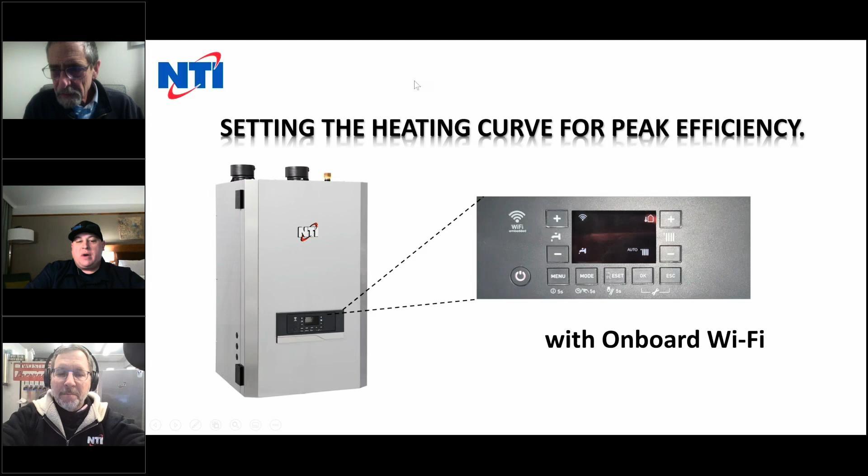So let's take a look at this. Now, keep in mind, this control comes with onboard Wi-Fi. Please reference the manual, because you may be working on a TRX 85 through 199, or you may be working on an FTVN, or you may be even working on an older TX model. So every parameter is going to be different. Even the control platforms would be different if you're working on a TX versus TRX. So the NTInet control can be programmed to fit a number of units.

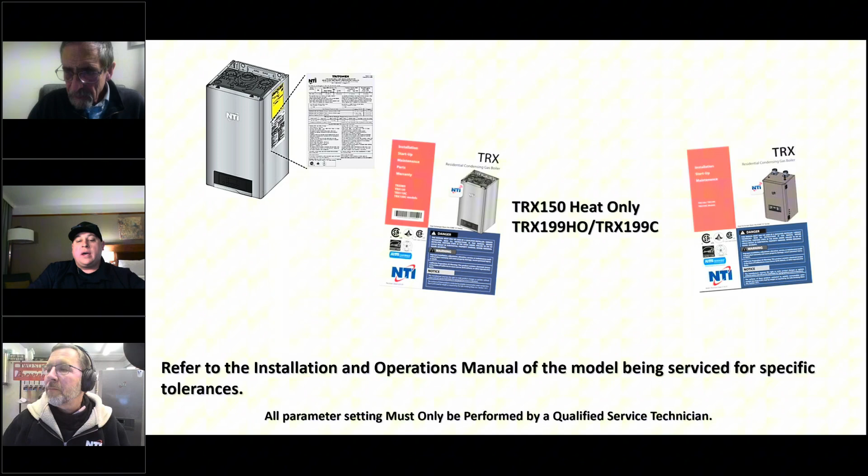So if you have, for instance, a TRX 110C, you can take a board from your parts kit and put that in a TRX 110C. You can also take the same board and put it in an FTVN 110C. So the board's interchangeable across the board. It's a really nice control, and it has some really great features. That's what we're going to outline today, how to understand the different parameters and how to set those different parameters and understand what those parameters do for the system.

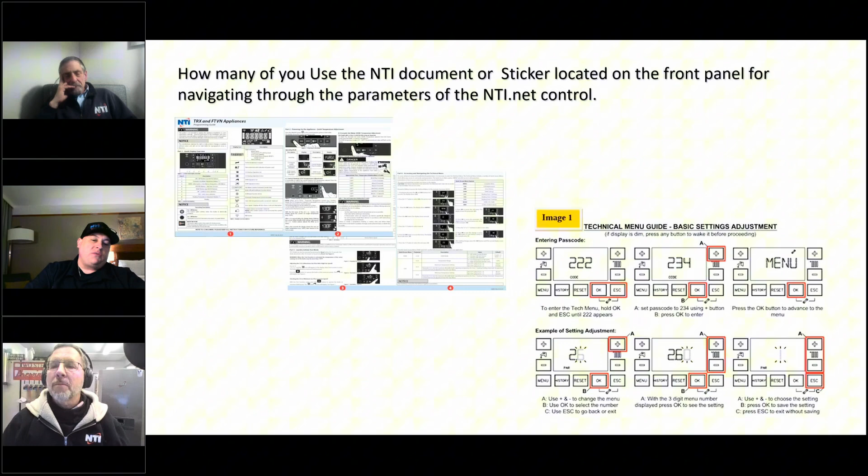So how many of you guys and gals use the NTI document or have attended one of our training classes, or possibly have reached out to myself, Ted, or Steve, and we emailed you this document? Also, our tech support staff will email this document out to you. The one on the left-hand side there at the top is what we call our quick startup guide for the TRX and FTVN units. In the future, we'll upgrade that to also reference the TFTN. But how many of you guys and gals have used the little sticker right on the front of the display on the FTVNs and all the heat-only models and combi models?

Isn't this a poll question? Well, so just reference to that sticker. It's also going to help you navigate through the technical guide.

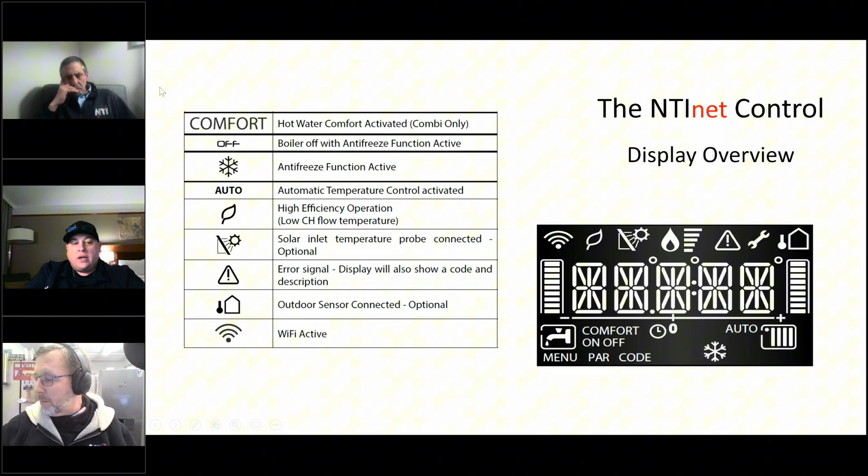All right, so domestic hot water settings can all be adjusted on the left-hand side of the display. You can advance up and down with the plus or minus key. It's very simple to set the domestic setting on this control - everything for the domestic happens on the left-hand side.

Keep in mind, moving forward, we'll go through how to access the technical menu and how to get into parameter 420, 425, and 426. We're going to access the technical access point, and at that point we'll be on the right-hand side of the screen where all the action happens.

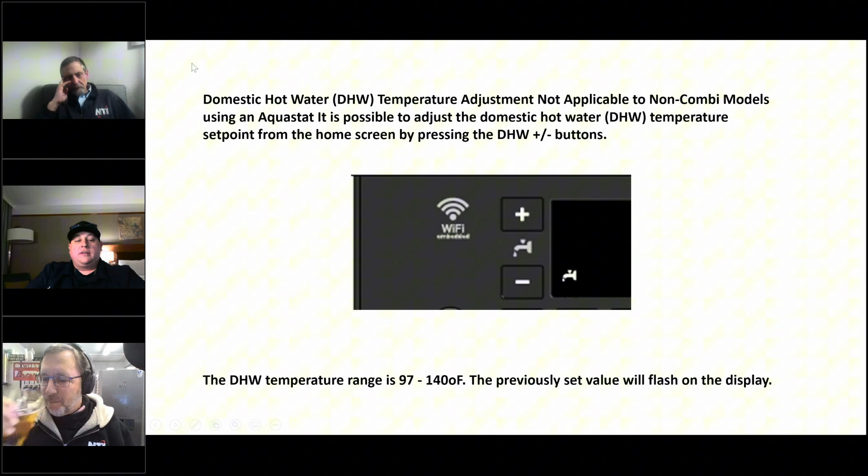What does 420, 425, and 426 do? They're going to set your parameter curves. We will talk about that later in the presentation. I'd just like to know what they're for, that's all.

Okay, well, I can tell you - somebody on this call wonders what they even mean. Kind of what I was trying to hint at there, Ted. Well, 420 is going to be your set point. So the 420 parameter, which we'll review today, will be your set point.

You have two options there. Your first option is 0 for low temperature, your second option is high temperature. So we're going to go over how to set 420 and what the temperature options are in 420.

We're also going to go over 425, which is your high end of the curve, and how to set that curve to peak efficiency for your system. What's a curve? Well, we're going to talk about the outdoor reset curve.

Okay, good, thanks - yes, we'll get to it, we'll cover that. But there's one thing I want everybody to know about this control, which is a really nice feature - I've heard Steve and Teddy and a lot of the guys use this feature - it's the long press option, because it can tell you what's going on.

So in the menu option, you can use a long press option, and it can tell you what your outlet temperature is and what your flue temperature is. So if you guys and gals are out there doing preventive maintenance, you can basically look and see how dirty the boiler is just by referencing your supply temperature and your flue gas temperature.

Hey Jason, the way it's displayed on the screen - yes sir. So question for you: the reset button, to reset it, what do you do? Just tap - is that long press?

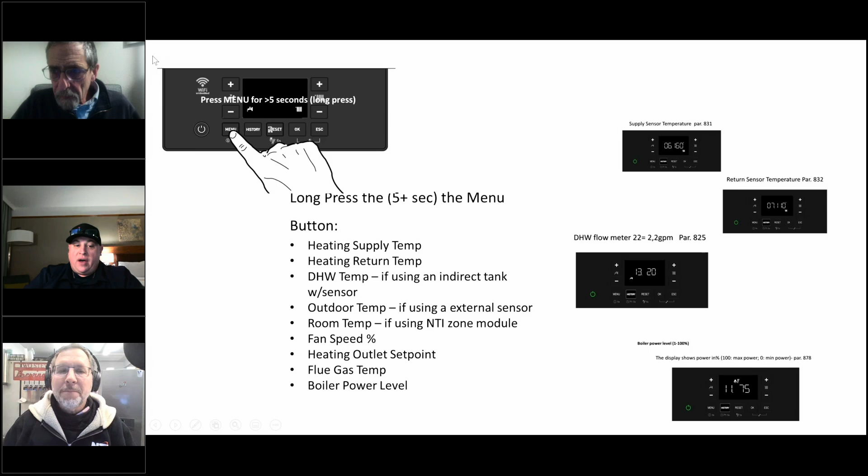Now, long press is only accessible to the menu button. So holding the menu button - keep in mind the menu button has other options. That's where you set your internet, where you activate the Wi-Fi so it can handshake with our server. So there's a lot of features in the menu button.

The history button will give you things like what version of the PC you have, error history, like what errors did you have. And you can also access the same stuff we're going to go over today through the computer screen. So keep in mind, long press is a really nice tool.

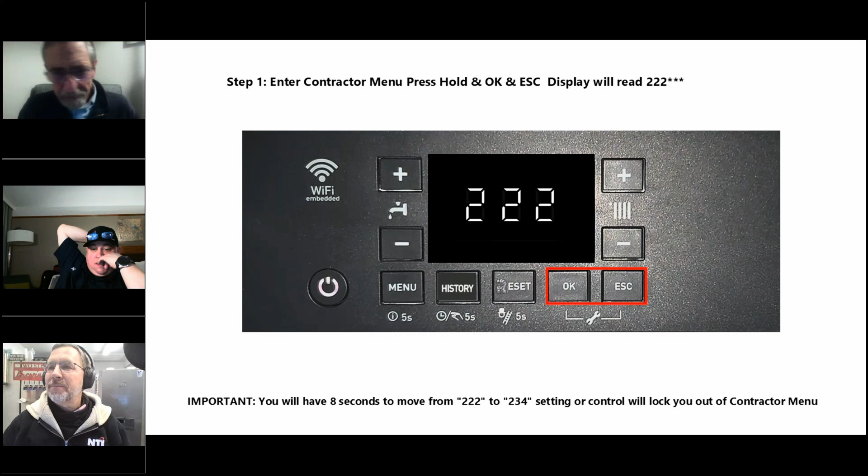That could be because they're doing it through the computer, could have somebody who's got the contractor access, accessing it remotely. Yeah, that's what I would do, that's what I do. Or I can just walk you through it, we're gonna do that right now.

So real important that when we access the technical menu, we keep in mind everything for domestic happened on the left-hand side. Now we're going to what we call the technical access point, which is indicated by a wrench. You can see on the bottom here, there's a wrench, and it's outlining both the OK and escape button, indicating that's a technical access point.

So what we're going to do is hold those two buttons in for approximately 10 seconds. Keep in mind, you're going to have to press it hard, don't just lightly tap it. Push in and depress the buttons evenly at the same time. You'll see 222 will be displayed on the screen.

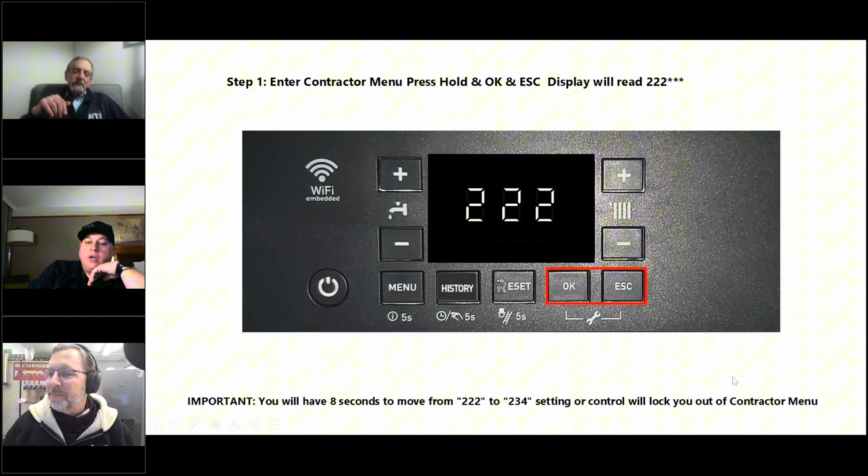Now here's what I want you to do. Over here on the right-hand side, we're going to use this plus key right here. We're going to advance up to 234. Once we get to 234, all we're going to do is hit the OK button.

Now it's very easy to get into the parameters at this point. You can go through the menu option, which if you do, you go through each step, but it's very simple. All you want to do is hit the OK button, and once you do, you'll see a number displayed on the screen.

Now the handout that's attached in this webinar is the same process that we're doing here. It walks you through how to get into these parameters. So we're going to look at some of the very important parameters.

First one we're going to look at is going to be 228. We're going to use this plus key on the right-hand side there, scroll up until we change that first number to a 2, then we're going to hit the OK button.

We're going to continue to use this plus key on the right-hand side. We're going to make the second number a 2 and hit OK. We're going to make the third number an 8 and hit OK. Once we do that, we're going to be into where we can set what type of system we have.

Now let's say we have an indirect, so we want to enable the indirect. So we bought an S20 tank, or one of our storage tanks that you bought from the wholesaler, now you got the tank sensor, and you want to hook up the tank sensor.

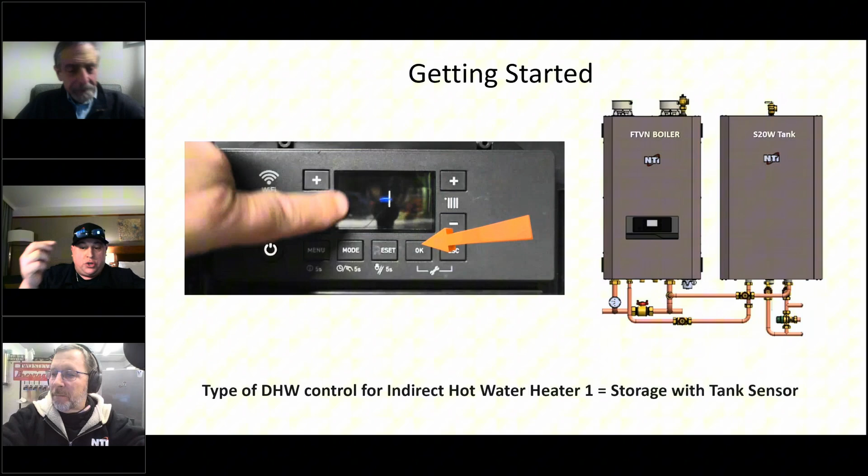So all you're going to do is go into parameter 228, and when you hit that OK button, you're going to see an option, it's going to say 1 or 2. 1 would be for a sensor, okay?

2 would be for an aquastat, and if you have a 1, it would be a sensor. So if we just bought an S20 tank, we mount it on the wall and run the sensor back to our sensor leads, which will be marked on the control. You'll see it on the control - it is a red terminal. That's for the tank sensor.

Could you hold that up again so I can see it better? Yeah, can you see? Hold it closer so we can see the red. Oh, there it is, thank you. See that? All right, so you have both options 1 and 2.

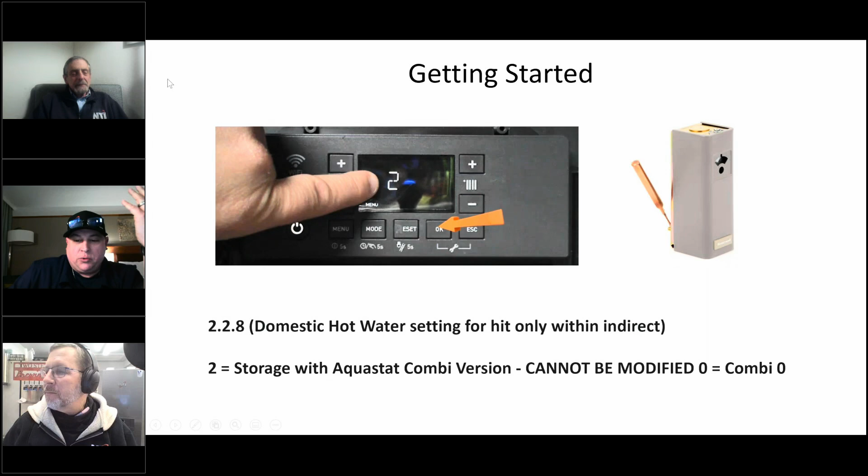2 is for the aquastat. Now whatever aquastat you get with your water heater, if you're using our indirect or another indirect, this boiler can work with any indirect. So if you have an existing indirect, you can adapt this to it - it would be a retrofit.

Now once we're done there, we want to hit our options. We want to hit escape and go back to the first number. Remember, the first number will be a 0. We want to scroll up with the plus key and make that first number a 4. Now we're going to hit OK. Once we hit OK, we're going to make the second number a 2 and hit OK. We're going to make the third number a 0 and hit OK.

Now we're in 420. 420 is our option for both low temperature or high temperature. Option 0 will be for low temperature, and for heating, yes sir. This has nothing to do with your curve yet - we'll get to that. But this is the set point for the 420 parameter.

Okay, so 420 is our set point. Now what we want to do is decide what type of application we have. Do we have cast iron rads, like in my house, where 150 is my maximum temperature? Or maybe we have a high mass radiant system with a little bit of snow melt, maybe a sidewalk that has some snow melt in it - well that's a low temperature system. So that would be option 0, the low temperature option.

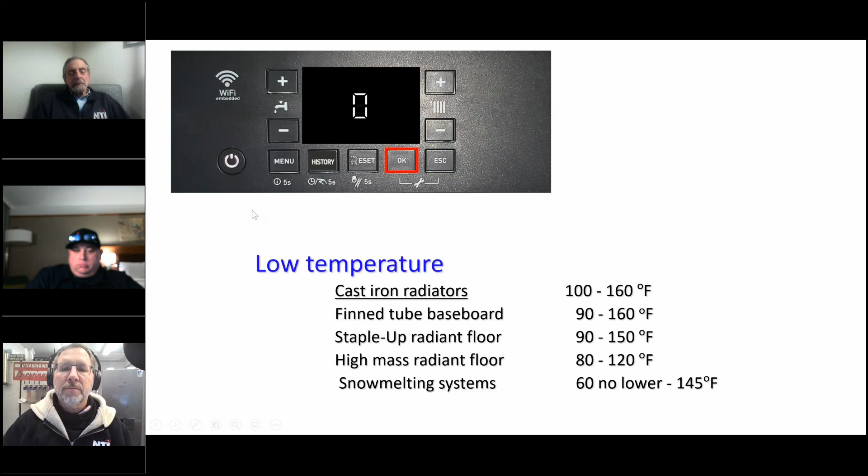No, next one. Yeah, I could take that out as a copy. No, okay, just wondering, just making sure. No - if you were paying attention, 228 sets that parameter for the indirect tank. Okay, that's fine, so that's that.

So what we want to do is go back, but I don't want you to go all the way back - all we got to do is hit the escape button once. Once you hit escape, it's going to get rid of that third digit there. All you guys got to do is hit the plus key. Once you hit the plus key, change it to 425, so that last number will be a 5. Hit the OK button. Once you hit OK, it's going to advance you to a temperature reading.

Now, decide what systems you're working with. You could be working with cast iron rads, like we showed some examples there. You can run them down below 150 degrees. Steel panel radiators, you can run them down below 140, 130 degrees. Remember, the colder return temperature, the more latent heat we absorb from the flue gas, allowing it to reach its dew point. Very important. Air handlers, depending on the specification and design of the air handler and how much CFMs they need to deliver to satisfy certain BTUs, you need to supply them accordingly.

If we have baseboard systems, let's get away from the old idea of 180 degree temperature for baseboard systems. No, that is not true. Remember, the whole point of this training is setting our system to its peak efficiency. So stay below 160 degrees on baseboard systems. A lot of these new manufacturers of baseboards give you lower curves.

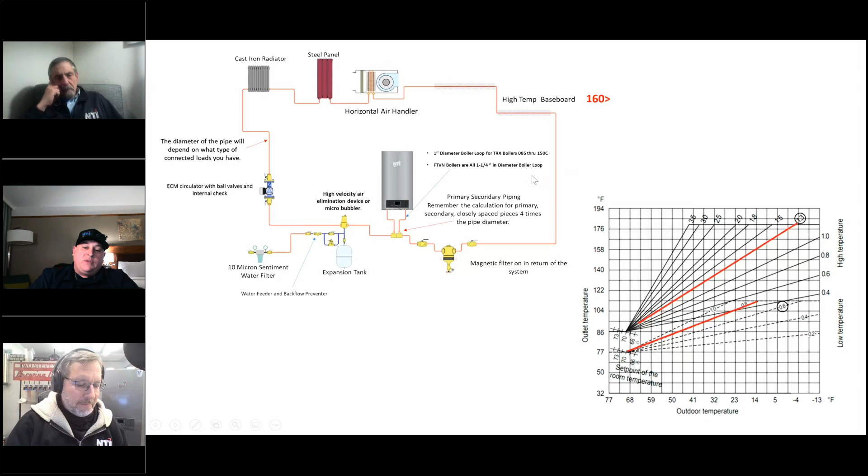Okay, really nice slide here. Shows you the diameters for different boilers. You can see your 85 to 150C, which would be our TRX version, and then our FTVN, all sizes are inch and a quarter. Just telling you what size pipes off the bottom here, and some of the different components that are needed — some of the components I show you in this slide are here to make that system more efficient.

We have a little magnetic action going on down here. We got proper air elimination. You can notice this right here. You got a little micron filter here. It's the way to go. Protect the system, all right.

So as I said before, each boiler comes set at a 1.3 curve. You can see on the right-hand side here, our 1.3, outlined here in red. That's going to be our curve. So let's say, for instance, the outdoor temperature is 5 degrees. We're going to go up to the 5 degrees here, and up to our curve. I'm going to cross over here.

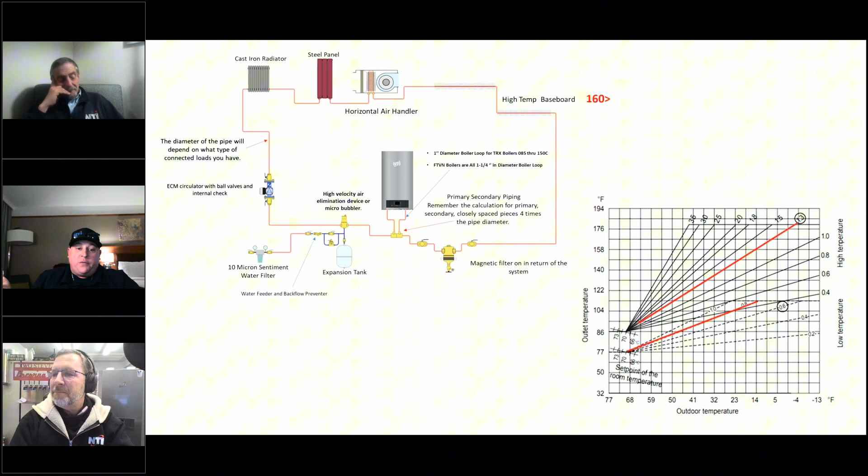That's approximately 165, 170 degrees. So let's adjust this curve down. Let's turn this down, adjust that down to maybe our maximum temperature, 150 degrees right here. Let's go to 150 degrees. Let's allow that boiler to condense a little more. If you have steel panel radiators, I'd be throwing the system down to 140 and try to adjust that temperature down. So keep in mind, whatever you set that curve for.

Now, you can also set the outdoor reset curve. You can adjust the outdoor reset curve through 2 ways. You can go into the menu option and change that curve. Now, you can also do it through the computer, which I do. I change it from time to time. I'll mess around with my boiler, and I tried to adjust it down to a 1.0, and it was all right. It didn't get so hot upstairs as it's been getting, but you can adjust it. You can really play with the curve either through the display or through the Wi-Fi, the contractor interface.

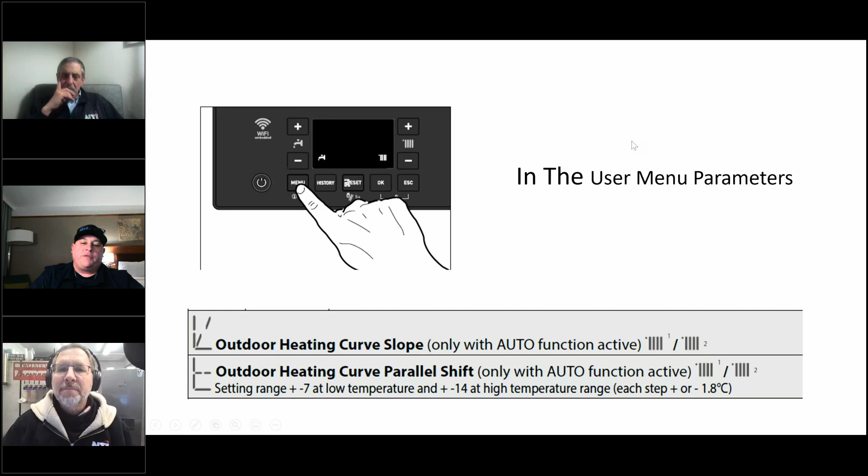So 425 is what we're going to set our high temperature. That's going to be our high end of the curve. And when I mean the high end of the curve, so if it's set at 179 degrees and it's set at 90 degrees on its low end, it will modulate between 179 degrees and 90 degrees depending on the outdoor temperature. Because if it's 30 degrees outside, you don't need 179 degrees. You may only be getting 140, 150 degrees. And that's where you need to reference your curves.

So as I said before, my system's set for 150 degrees. So I have mine set for 150 degrees. All I did was go into 425, and I used the plus and minus key here to pick your desired temperature. Once you pick the temperature, hit OK. Remember, anytime you make a change to this display, you must accept the change you made by hitting the OK button, which is down here.

Remember, our technical menu — that's where all the changes will happen. Now, you did see on the first slide, I said right in the bottom caption, this must be done by a trained technician. You don't want to have homeowners in there changing parameters.

Listen, you don't want them changing parameters, so let's try to keep them away from that.

All you're going to do is, once you see 425 on this, hit escape. Don't go all the way back, remember we're only changing that third number. So now we just set 425, and we set it for 150 degrees.

Now we're going to go into 426, hit OK. Once we do that, we're going to set that for our desired temperature. I decided to set mine for 80 degrees, so I used the plus and minus key to scroll down, set it for 80 degrees, and hit the OK button.

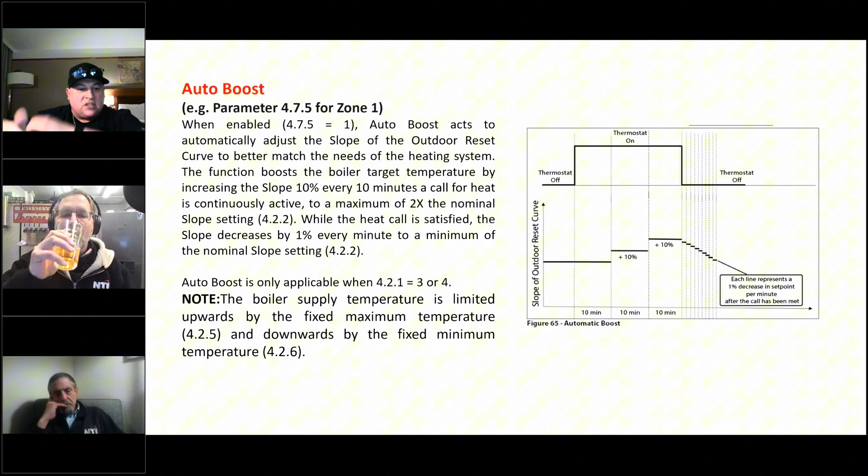The cool thing about this is, as the system starts to come back and it sees the temperature difference between supply and return, it's going to shut down. That heat will be left in the heat exchanger. Now if another zone comes on, it will feel that zone, take that heat from the boiler that's already there, dump it into the system, and just start over again. So you'd never know that the outdoor reset's hooked up.

I always recommend you hook up your outdoor resets. There's some really nice features in this boiler. The auto boost function is a great feature. It's going to help you, and it's going to make your home system more efficient.

So Jason, yes, auto boost, so that's for when people's thermostats won't get hot fast enough. So that would be kind of like your contractor callback mode, right? Yeah, there you go. Like high on the circulator. But like on a radiant system where you're going to have a call for almost 20 of the 24 hours, you don't necessarily want to turn on the auto boost because you want it to modulate there, right?

No, we're talking more about the baseboard systems where people had a nice cast iron boiler sitting in their basement for 20 years, just giving off 180 degrees all the time. They never thought about outdoor reset. It was always nice and warm.

I remember driving down in certain areas, they had to turn the heat on in September for the rental properties, and you'd see the upstairs windows all wide open because they just cranked the heat up. We just dump all that heat. That's just wasted energy. We got to get away from that.

We got to use these features built into the boiler, like right here, high temperature system. We use this to help us.

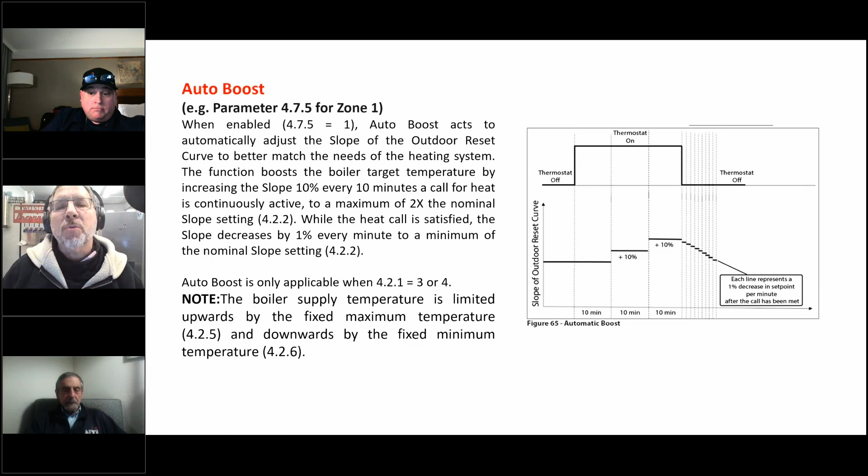So now we know that most people set their curves too high. This will also do the converse too, just like it did in your house, where it actually sets the temperature back every minute. It shifts it down 1%, right?

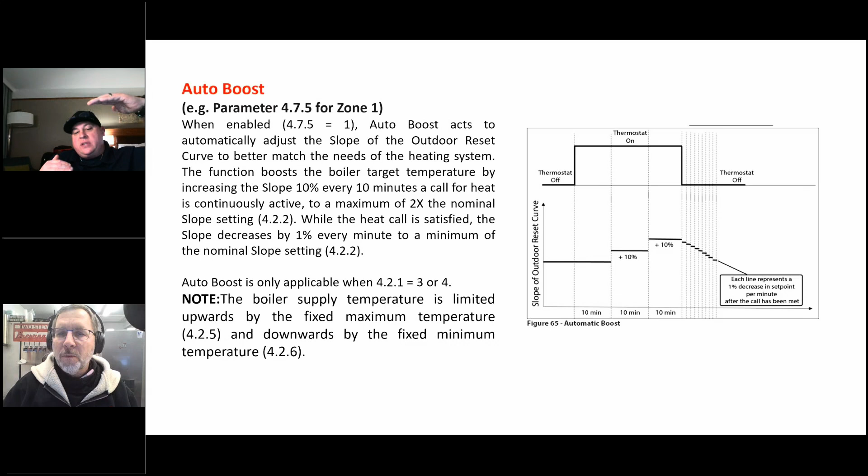Yep. So it still keeps it within that minimum maximum that you set, right? Oh yeah, wherever you set 425 and 426, it's always going to modulate between there. So whatever that's set for is its reference point, it's always going to reference to that. Now keep in mind that's its firing rate. If you have it set for 160, it's going to get to 160.

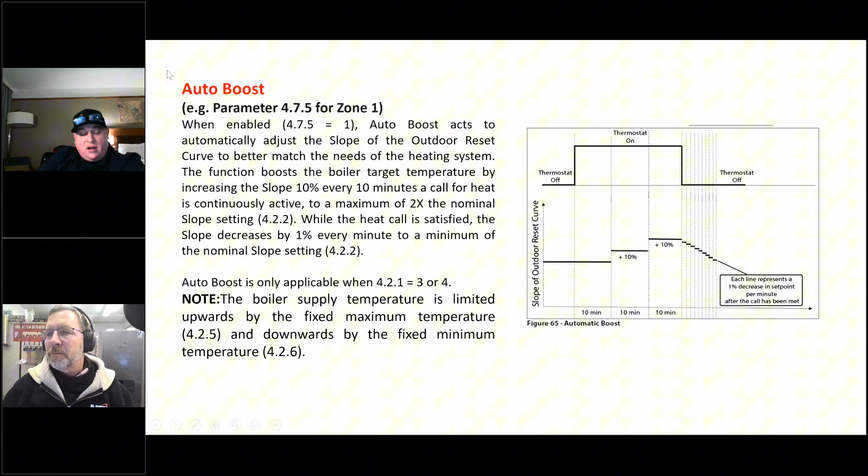If it's not satisfying, it's going to increase the boost until it gets there, and keep doing that and constantly run. Remember, these systems don't need all these BTUs. You don't need to be at 180 degrees. It only goes to 179, so that's all you got. Boiler goes to 179, can't change that.

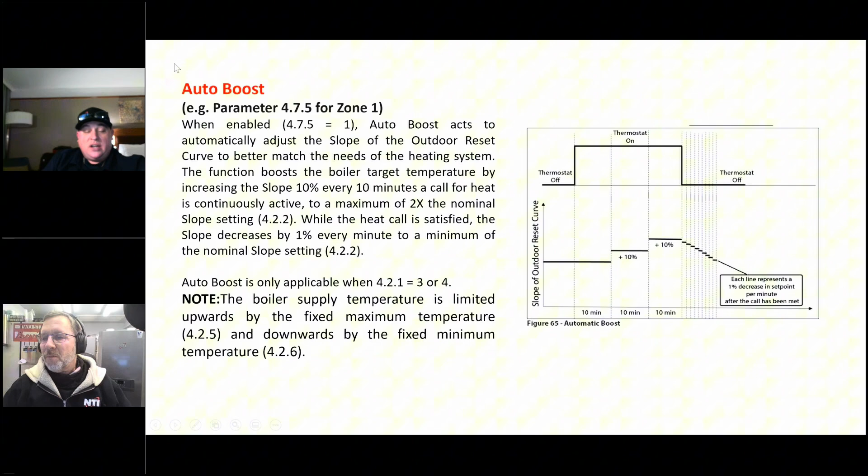Once we're done with that, all you guys got to do is hit the escape button right here and go all the way back until you get to the home screen, which will have your Wi-Fi, your little house for your outdoor reset, and then your temperature. Now, if your outdoor reset's not hooked up, this outdoor little house will blink and tell you that the outdoor reset's not hooked up.

Oh, the outdoor sensor, you mean? Yes, sir. Or the Wi-Fi weather, right? Well, no. Keep in mind, if the Wi-Fi weather is hooked up, the Wi-Fi signal will blink if it's not hooked up. But if the Wi-Fi weather is hooked up, the outdoor reset symbol, the sensor symbol for the house, will still blink.

But if I have the Wi-Fi weather turned on and an outdoor sensor on it, what happens? They'll both be steady, they'll both be steady. Okay, just clarifying for those in the audience. Yeah, one or the other.

But question, doesn't an outdoor sensor, if you hook up an outdoor sensor and Wi-Fi, doesn't the outdoor sensor override the Wi-Fi? No, you get an error message. No, the Wi-Fi always has precedence. The outdoor sensor is a backup to the Wi-Fi. That must be new because that's not what Jason Thompson told me.

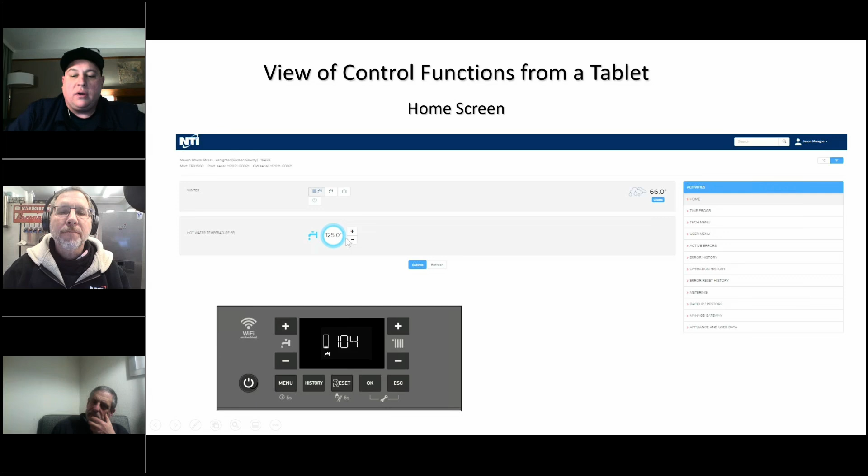All right, you can go and set your domestic functions. You can set that domestic function for temperature for whatever you want. You can even go in and set the 228 parameter, or the 420, or the 4.

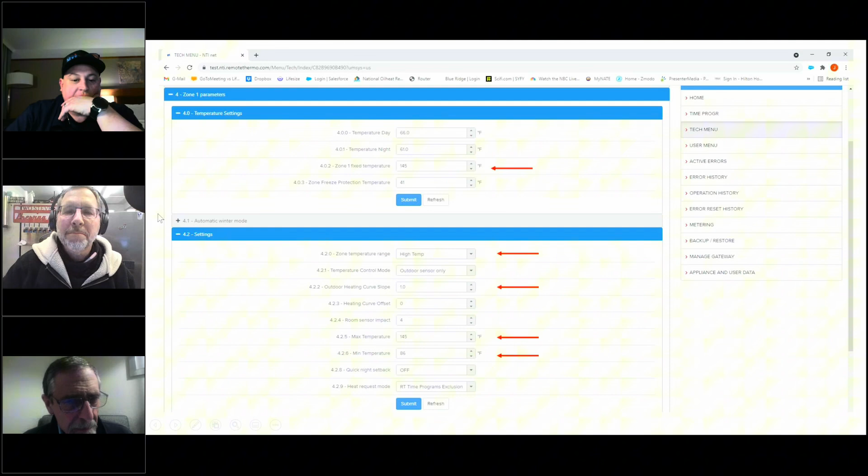Okay, let's just pause for a second here, Jason, because this actually makes something you've been chattering on about a lot clearer to people. All those 3-digit numbers, the 420, the 425, the 428, the 369, whatever, they all correspond to a setting that the boiler can be adjusted to. Now, understand there's probably 50 or 60 different settings, but you really only probably play with, in practice, 4 or 5 of them ever. Yeah, unless you have a very special application. So, there's a lot you can adjust, but there's not very much you need to adjust.

Yeah, there's like 860 something. So, but all those 3-digit numbers, they all correspond to a particular setting on the boiler, which becomes much more obvious when you're looking at it on a computer or a tablet.

Let's take a look at this. That's why I wanted to show everybody this. If you look at this screen, you can see 420 right here where my pointer is, and this arrow right here. 420 is high temperature. So when you hit option number 1, boom, it locks it in high temperature.

Now, it's telling you, if you look down here, 425, this is my screen, my computer. It's telling you my maximum temperature is 145 degrees on 425. 426 is 86 degrees. Now, my boiler's modulating between 145 degrees and 86 degrees. That's 425 and 426 right there showing you.

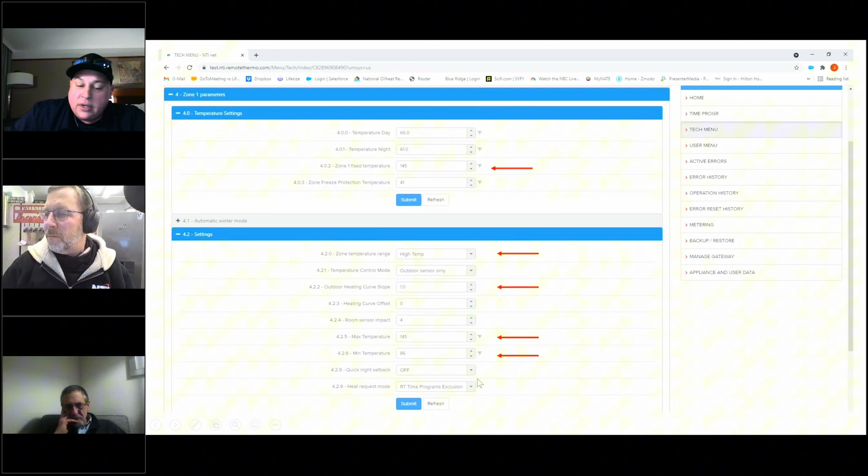Okay, if you scroll all the way down into 475, you will see option 1 will be turned on. I have mine turned on, so sometimes it may push the 145 limit. But it's so simple. And same thing you're doing in those parameters as Ted outlined earlier, it's the same thing you see here. It's so simple, and it's easy and it's free.

That's the thing, you can get on and just check your system, mess with the curve a little bit, adjust the curve, see what's going on. You see the curve adjustment here? See right here where this red arrow is? See the 422? That's your curve adjustment. You can adjust that up and down right there, right from the screen. You can do all that right there.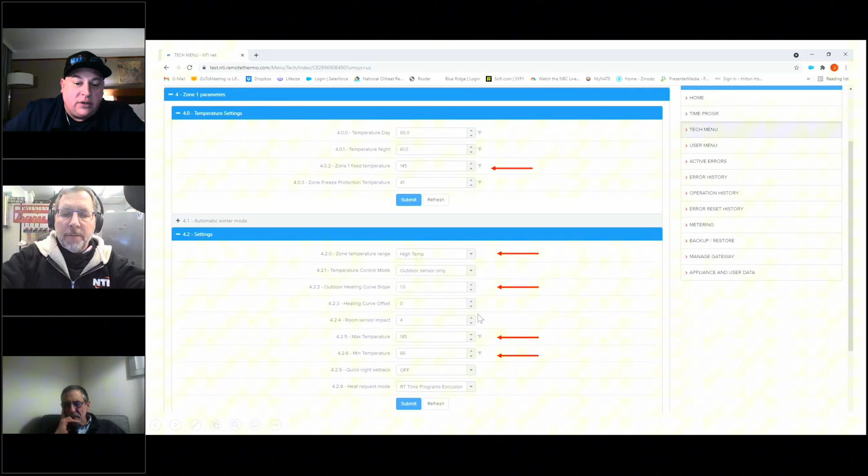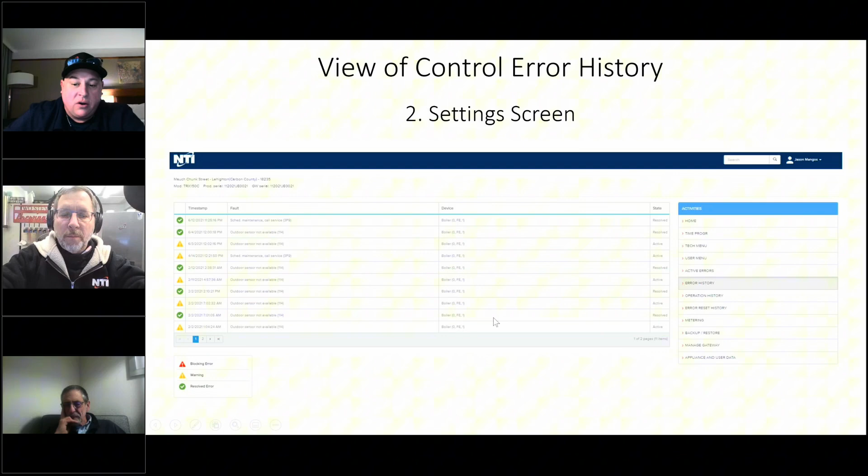And it gives you lockouts, it tells you when there's a problem. So if there's an error, if you mess with the outdoor sensor, like I messed with mine, look, it told me there was an error. And it resolved it because I changed the setting.